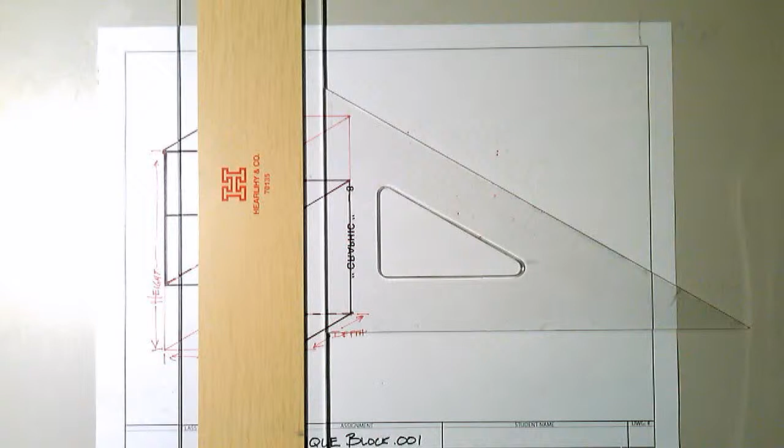Okay, we're going to pick up with enlarging one of the shapes off of this sheet. I'm going to pick the letter F because I want to show you how to take this block and carve away to show something like a window or a block out, as well as how to show back faces, back planes inside of here.

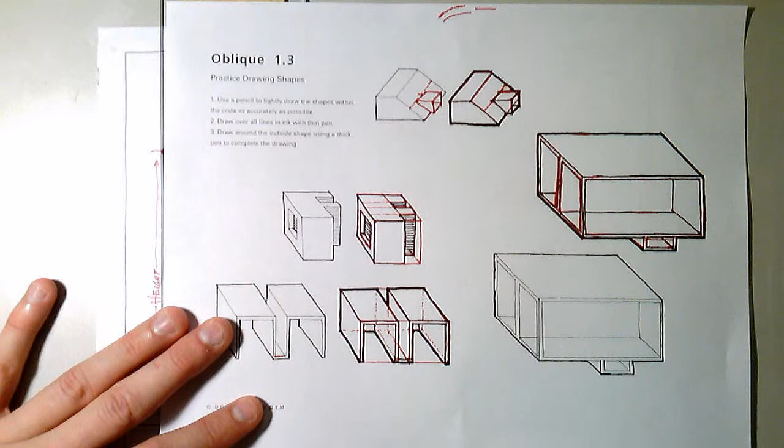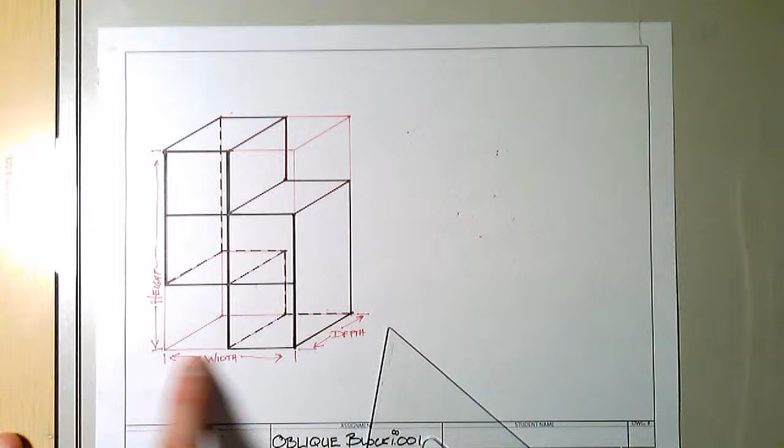The first thing I'm going to do, this is roughly a square right here, so I'm going to make a square as close as I can. We're not doing too much measurement, but we're using this as our beginning. I'm going to block out a square and enlarge this, so I don't want it too small. Similar to when we started, we're just going to pick a height and width, something square oriented. Let's see what we get here.

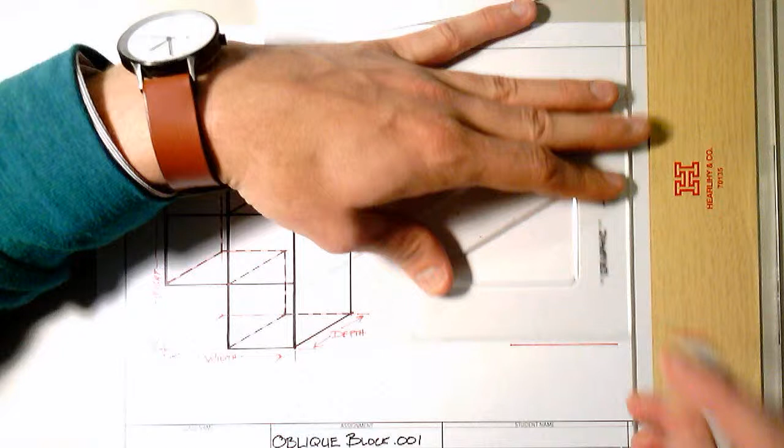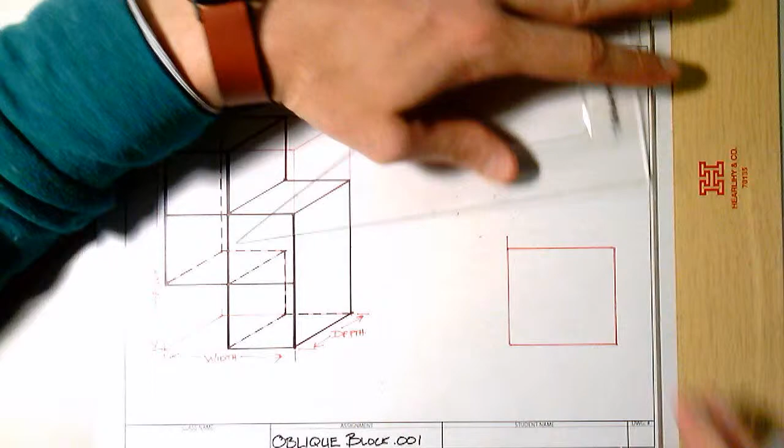I'm using a light pencil once again, just making a guideline. So now we've made that front face, and we're just going to make this rectangular prism.

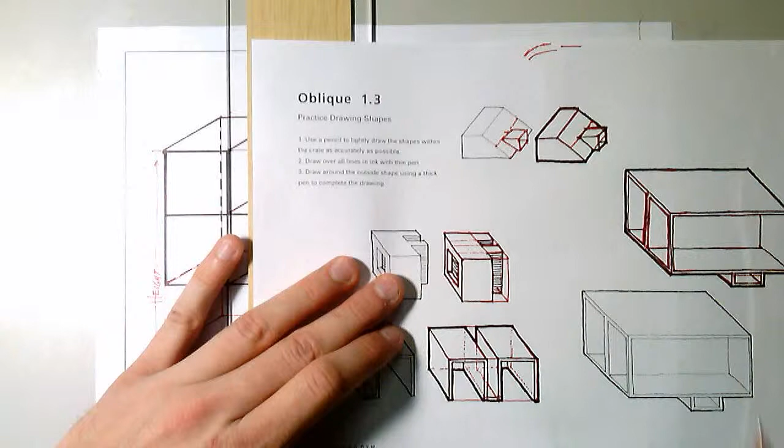So we do our projection lines back, that show the depth of the object. One thing you can do is look at this two different ways: we could do our 30 degrees, or take a look at the drawing and see roughly what angle they chose. If we look there, it's about a 60-degree angle, so we're going to do 60-degree projection lines.

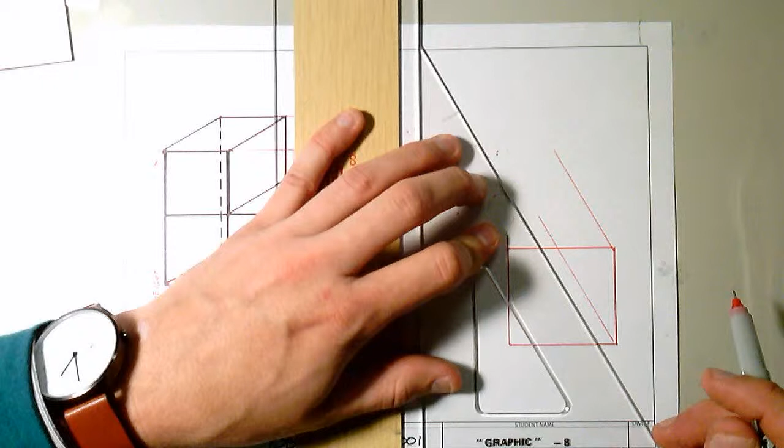This means you got to turn your triangle a little bit, and we're going to create projection lines back, very light lines, from all the corners.

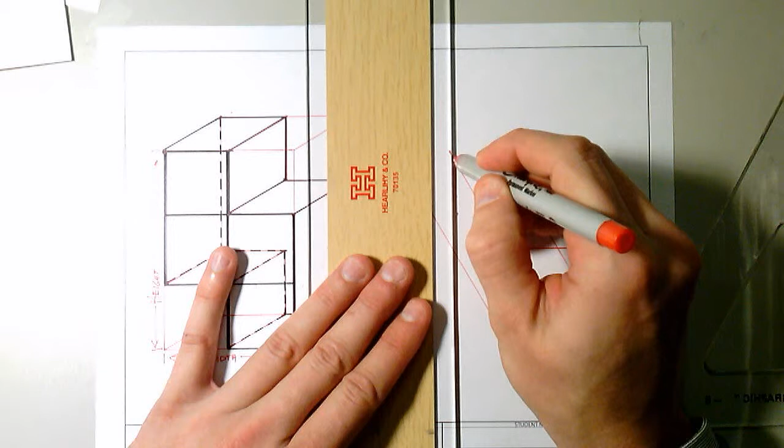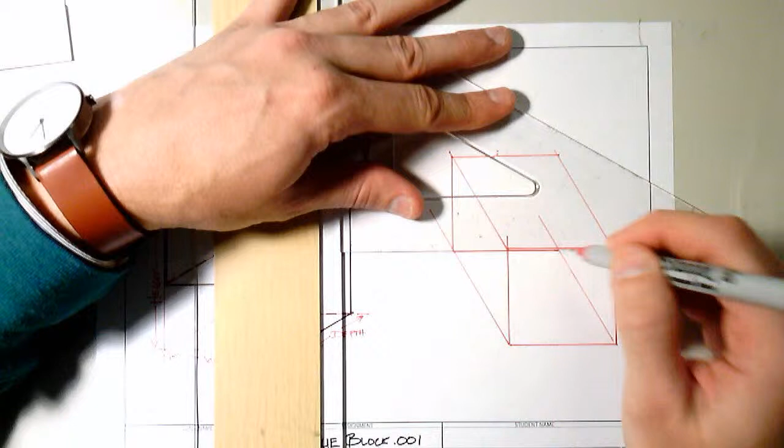Okay, so that creates some depth lines, and now we want to go ahead and terminate the back of that object so that we have a cube. Connect our back faces, and I'll even do that shape in the back so you get a sense of what's going on in that back face.

Okay, so now we've made a cube. Notice these lines are just off on the edge now, but that's okay, they're guidelines. When we come back later and darken it in, it'll all make more sense.

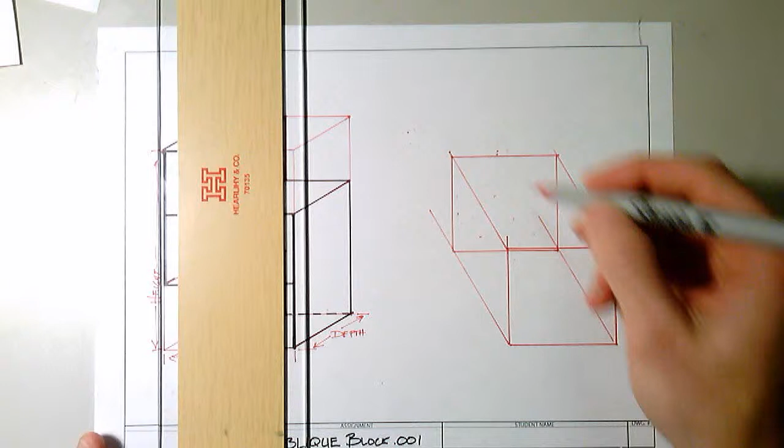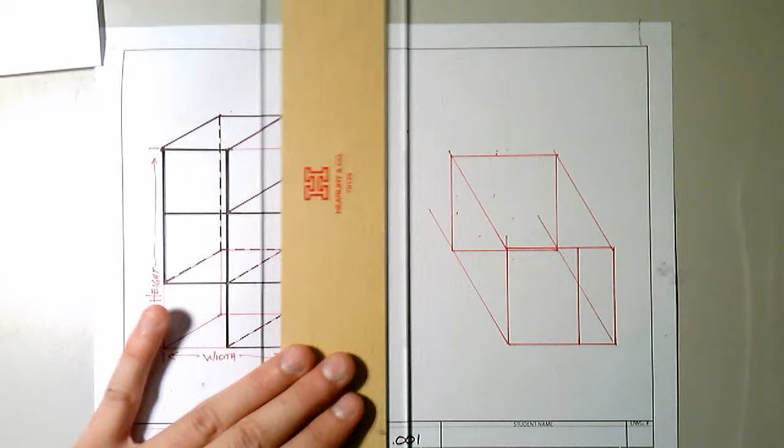First step in drawing this letter F is to separate, create that subdivided space on the side, in the front view. So I'm going to make a line to subdivide that, we'll do there, project off at 60 degrees.

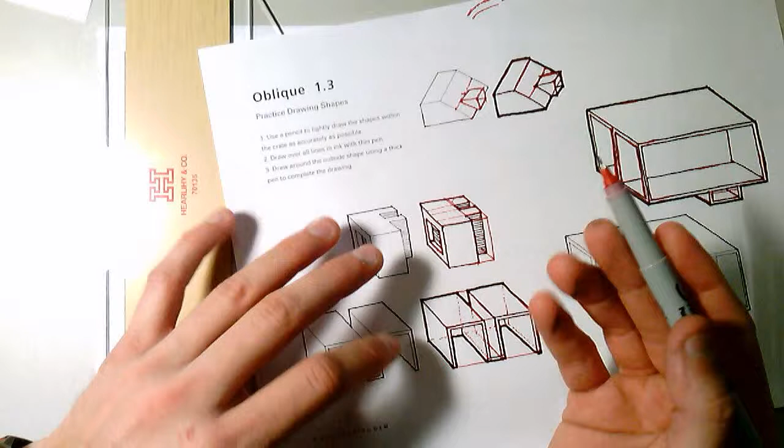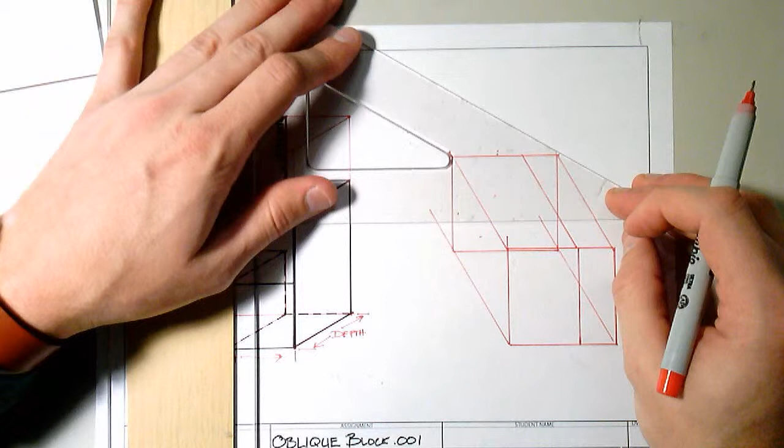That creates this subdivision on the angle. Now we want to divide the top into 1, 2, 3, 4, roughly - we're trying to find these little teeth on the edge of the F. The way we do that is we project our horizontal, by roughly subdividing this: 1, 2, and then 3. And what that does is give us the cutouts for our F.

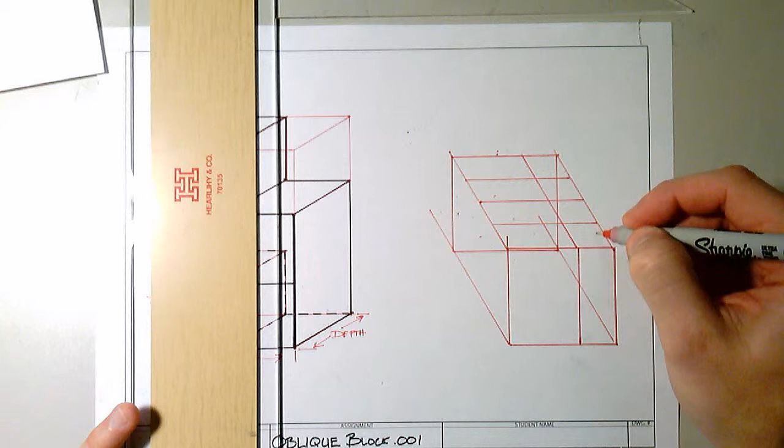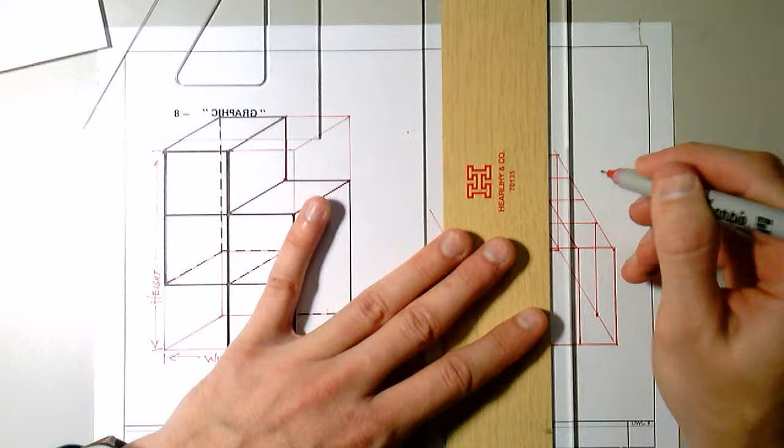Now the next step is projecting downward and showing that F, showing the leg there on the F. So what we do is project the edges, these back edges we've drawn, down to the bottom back edge. We do the same thing for the front, except we stop when we run into the next line, because everything is in the foreground as you come closer to the front of the block.

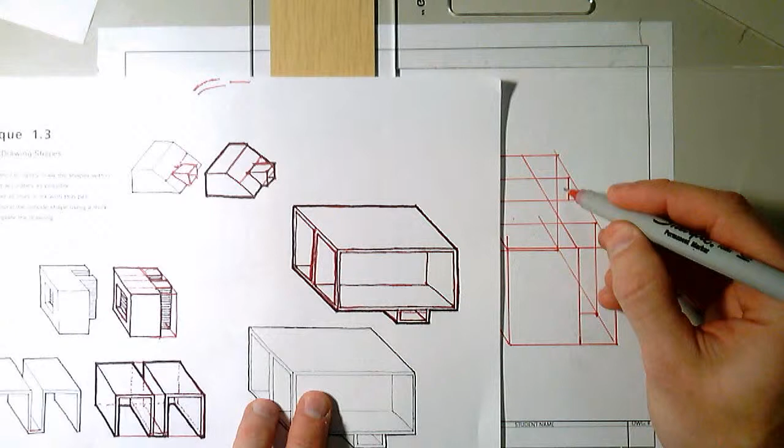So now once we've done that, we want to close off the bottom of this leg, and then we've created this leg of the F. This portion here is this portion, this portion here is going to be that portion, and so on.

We're almost there, all we need to do now is add a window, or this little punch out on the side of our letter F. The way we do that is create an offset boundary. So what we're going to do is make a few points here and here, about the same distance top and bottom.

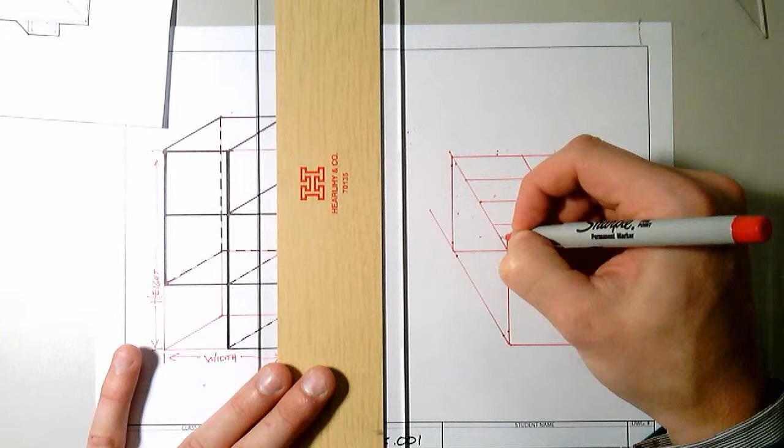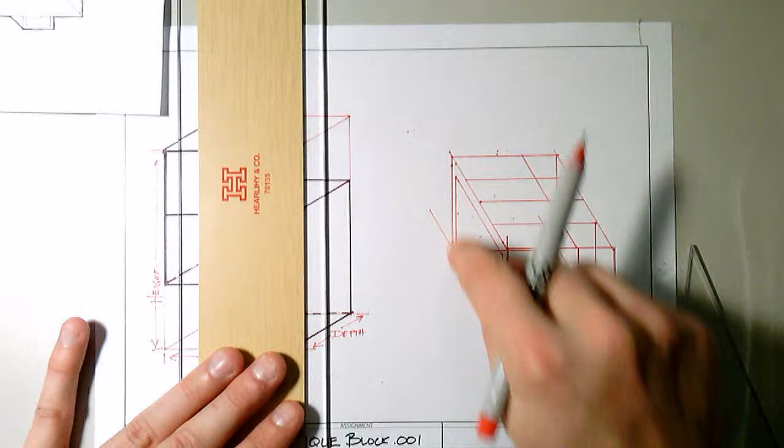We're also going to do the same distance on the bottom and top faces around the shape. So all I'm doing is making guidelines, and this allows me to frame in, to block in. I'm going to connect those diagonals, and then connect my vertical dots. And I've made a boundary around the inside - this is called an offset because it's the same shape but slightly smaller.

And then we want to show the depth of that offset shape. The way we do that is project a little horizontal line from the corner to show how deep this window is, and we'll make it not too deep. We create a vertical line that only goes to the top of the block out because we can't see back in there.

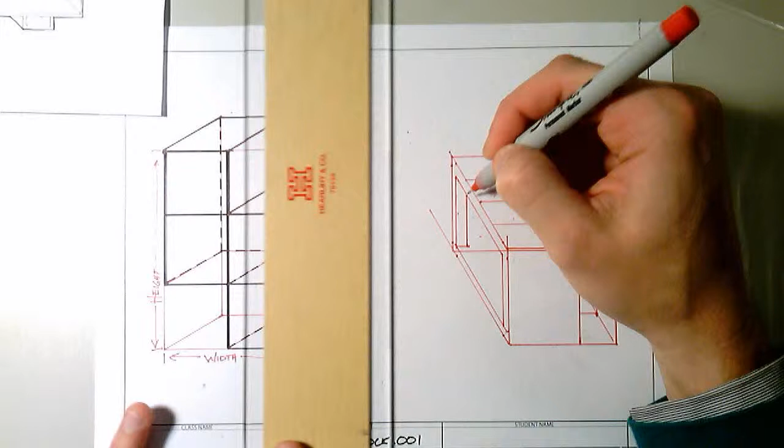And then we take a 60-degree projection line and project that back to the front of the drawing. Oop, that was a little off.

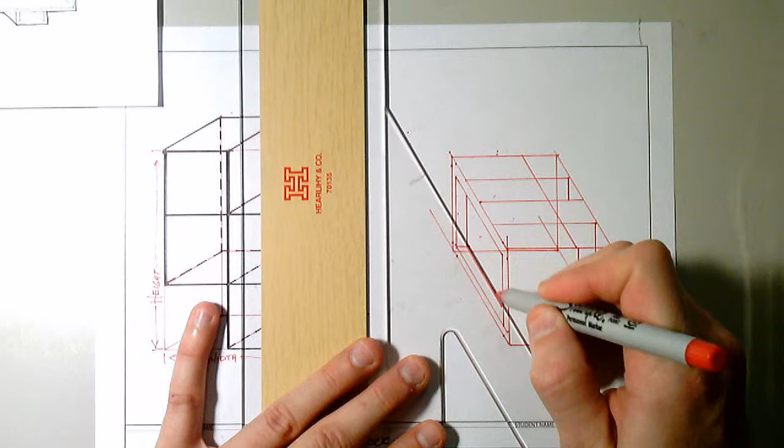Now, with everything we've shown here, we've got the whole shape. Now we just need to draw our parallels, so I'm going to come in with my heavy pen or my light middle pen and darken in what really matters. That means we've got to come in and make this shape look like the letter F, so we're going to kind of sketch over what we've created carefully so that we don't ruin it.

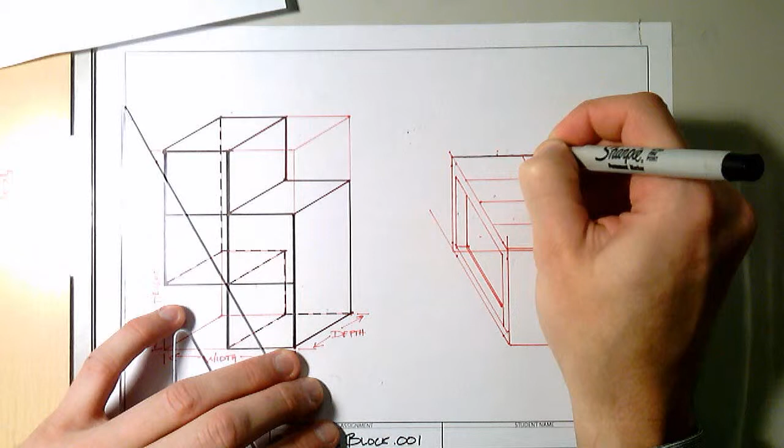Tracing around the letters.

Now I'm just showing all those things that are apparent in the view. So those light lines I used earlier to make some of the construction lines don't show up anymore, they're not darkened. If you wanted to, you could come back and add hidden lines to show some of these back faces, but that's up to you - it may help you.

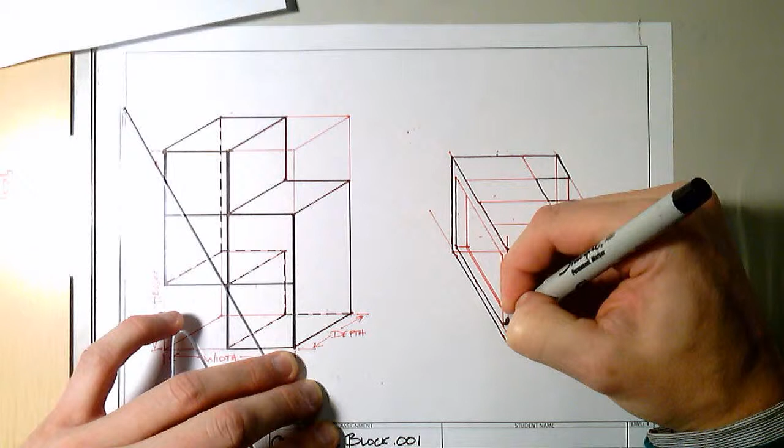Notice how having a straight guideline helps your sketch, gives you a kind of footprint to follow.

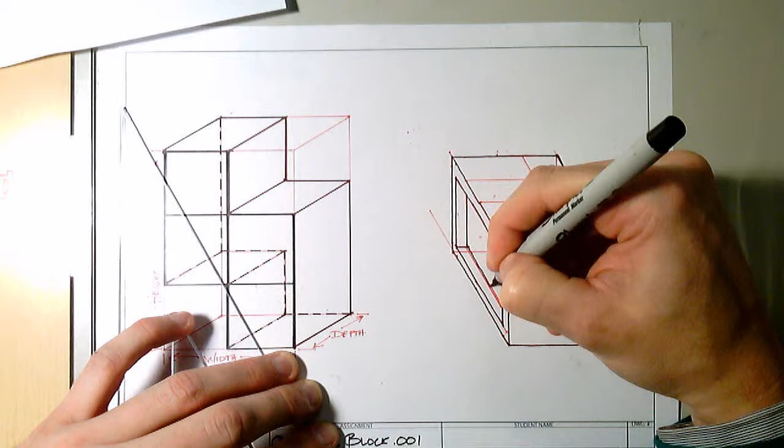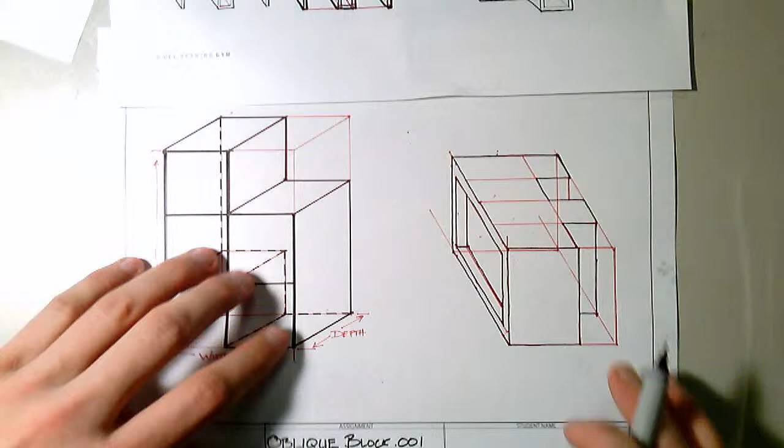One is we could come back and use our straight edge, or we could take our time and turn our page so that our arm and our sketch is horizontal.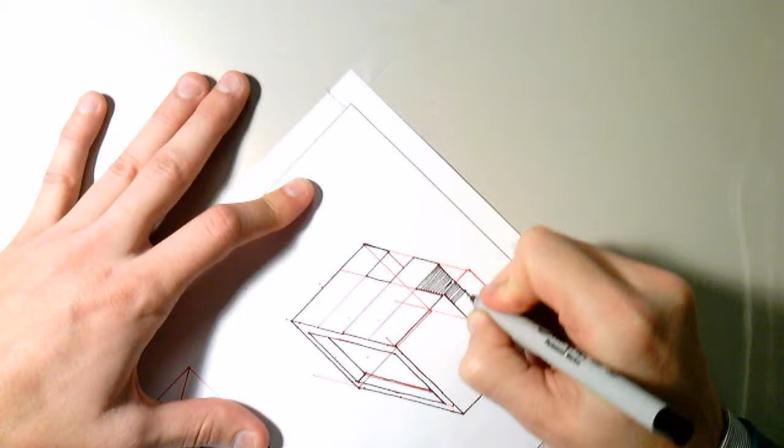Notice how I take my time to space each one as best as I can. This is not a time to get sloppy, especially when you've spent so much time setting up the drawing.

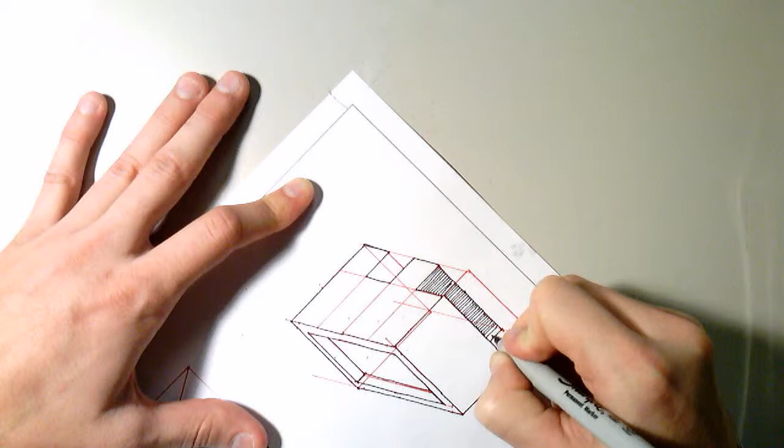Oops, forgot this back leg.

And finally, our window - I'm going to turn the window so that I can get a good angle.

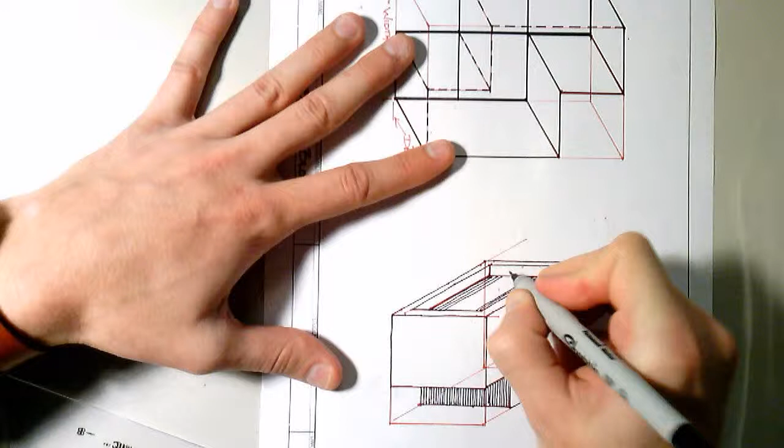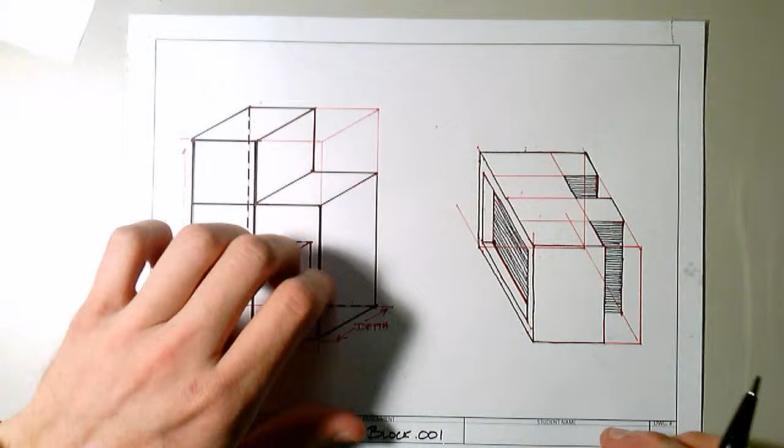Then we have our letter F. We finally come back to bold up everything that's on the border of the object.

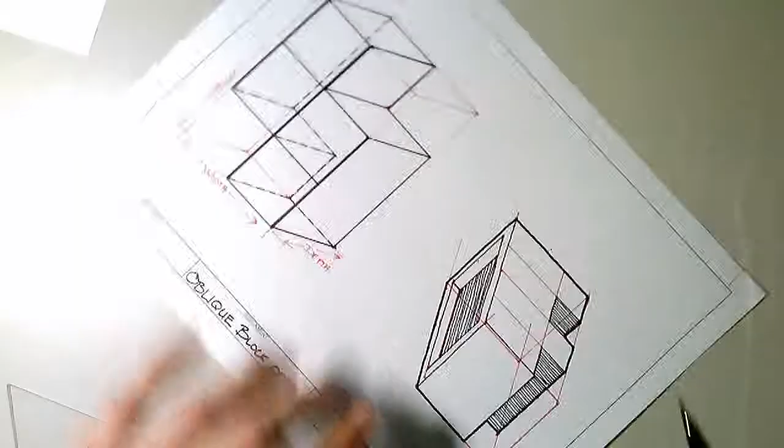And now we've enlarged, taken a smaller version of the F and placed it on the page. Good luck.